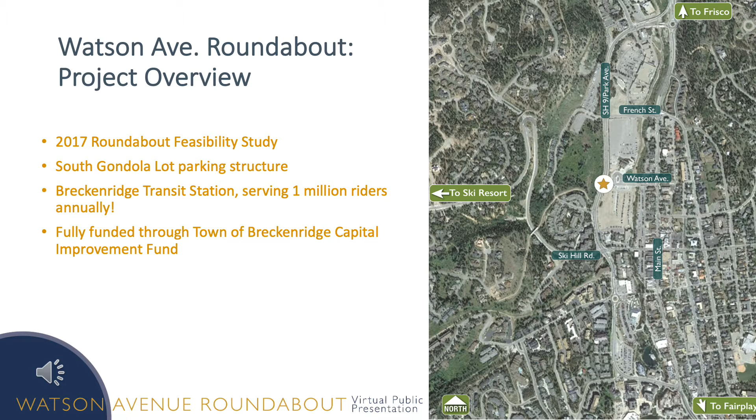The scope of this project is to complete a preliminary and final design of the roundabout, which addresses both the safety and operational improvements of the intersection. The town is also exploring reconstruction concepts for the transit station in conjunction with the roundabout design. More info will be coming soon regarding the transit station redesign. This project is entirely managed and funded through the Town of Breckenridge Capital Improvement Fund.

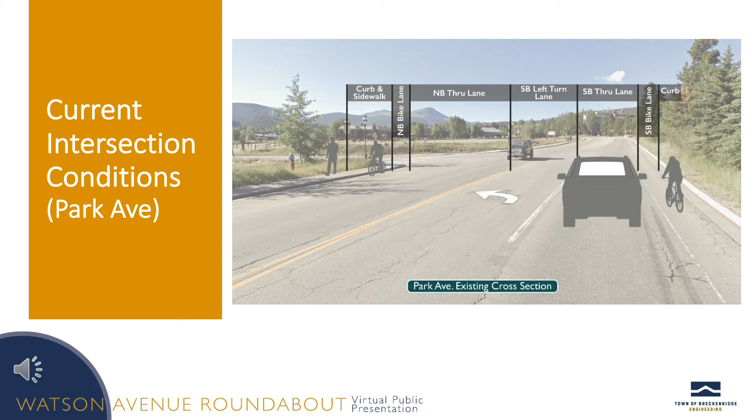Currently, Watson Avenue forms a three-leg intersection with Park Avenue with stop control on the Watson Avenue leg. Park Avenue has single travel lanes in each direction with outside bike lanes and a designated southbound left turn lane. Watson Avenue also has single travel lanes in each direction with outside bike lanes and a designated westbound left and right turn lane at the intersection.

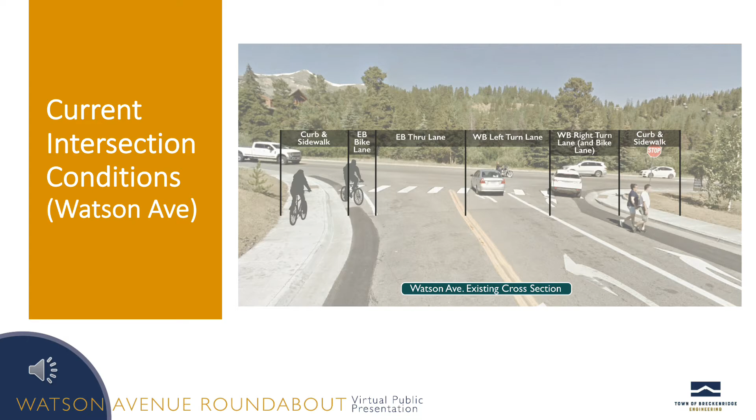The driving needs for the roundabout improvements include existing and future traffic volumes, additional parking being added on the South Gondola lot, high volumes of pedestrians in the project area, and overall safety improvements for all users. The stop control on Watson Avenue makes it very difficult for buses and vehicles to turn left onto Park Avenue. A preliminary traffic analysis verified that the existing intersection functions at a level of service F, meaning drivers see excessive delays and poor travel times, and the traffic exceeds the amount of vehicles that can be accommodated.

As mentioned earlier, the South Gondola lot is currently being redeveloped into additional parking. The combination of the surface parking lot near Watson Avenue and the new parking garage on the southern half of the parcel will be adding 425 additional parking spaces and substantial vehicle and foot traffic to the site. In the winter months, most of the people parking in this lot will be ultimately crossing Watson Avenue to access either a bus or the gondola at the transit station.

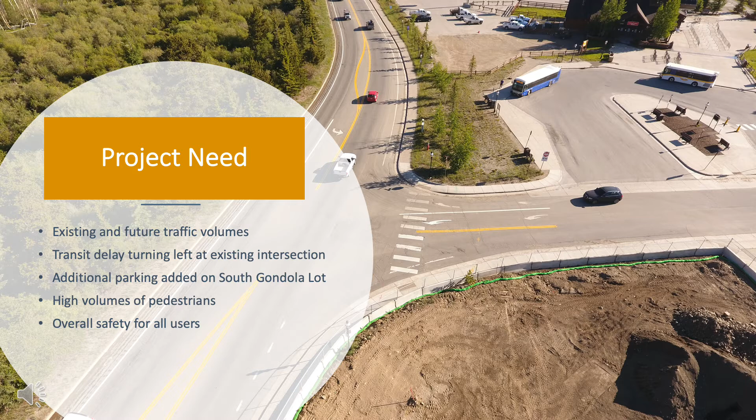The town is working with a consultant team to assist in completing preliminary and final engineering design plans for the roundabout. The extents of the roadway improvements measured from the center of the intersection extend approximately 400 feet to the east, 400 feet to the south, and 800 feet to the north. The land to the west of Park Avenue is currently undeveloped and known to contain wetlands. The wetlands will be avoided as much as possible, and the roundabout circle will be located in such a way to balance and minimize impacts to each parcel.

The preliminary traffic analysis played the main role in determining the laneage of the proposed roundabout. The projected year 2040 traffic volumes indicated a traditional single-lane roundabout would continue to function at a poor level of service, experience significant driver delay, and reach its capacity before the design year 2040.

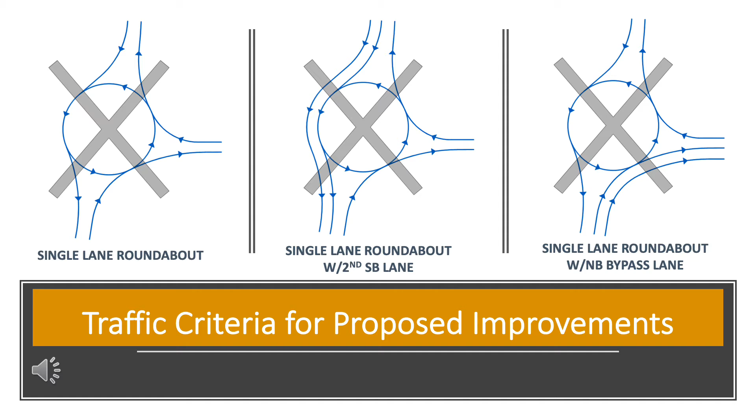Two versions of enhanced single-lane roundabouts were also analyzed, including combinations of a second southbound through lane or the addition of a northbound right turn bypass lane. However, no combination of a modified single-lane roundabout could accommodate all of the through traffic expected on Park Avenue by year 2040.

The town and design team ultimately decided on a multi-lane roundabout with two through lanes in the north-south direction and a single circulating leg entering and exiting off Watson. While the long-term vision for the Park Avenue corridor incorporates widening the roadway section from 2 to 4 lanes, this project will still be tying into the existing 2-lane section of Park Avenue.

As part of this project, the second northbound lane will extend from the parking garage access on the south gondola lot through the roundabout and merge back into a single lane prior to French Street. The second southbound lane will begin a few hundred feet before the roundabout to allow traffic to fill the lane, and then will merge back to a single lane at Mountain Thunder Drive. The through lanes cannot begin or end any closer to the roundabout without the roundabout operations breaking down and traffic queues backing up into the roundabout itself.

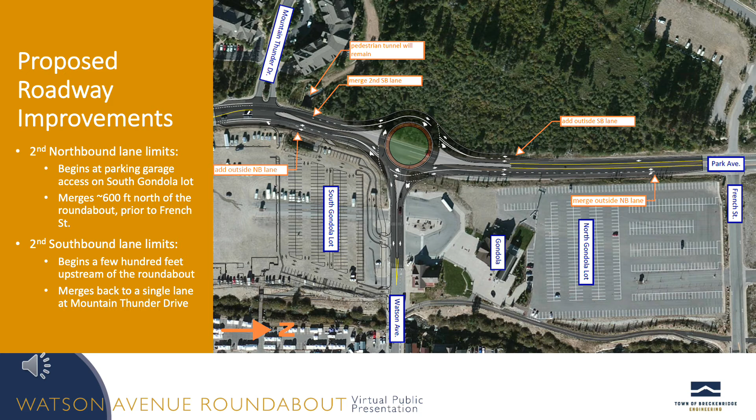Additional criteria that was used to inform the size and geometry of the roundabout included that all buses must be able to safely and smoothly navigate the roundabout without crossing any pavement striping or mounting any curbs. Larger trucks on Park Ave will also need to successfully navigate the through movement of the roundabout to continue along Park Ave, and slow and balanced speeds must be maintained for all movements at the roundabout to make it safe not only for vehicles and buses but other potential users.

Following a few rounds of conceptual layouts and refinement, the team has landed on this concept for the new roundabout. This concept is a multi-lane roundabout with 2-lane entrances and exits on Park Avenue and a single-lane entrance and exit off of Watson, includes raised medians on all approach legs to discourage unnecessary and unsafe pedestrian movements, has a northbound bike ramp located upstream of the roundabout entrance for recreational bicyclists to navigate the roundabout outside the flow of traffic, and it ties into the sidewalk in the southeast quadrant that is being installed as part of the parking lot construction. Lighting and landscaping have not yet been incorporated but will be added in the next phase of design.

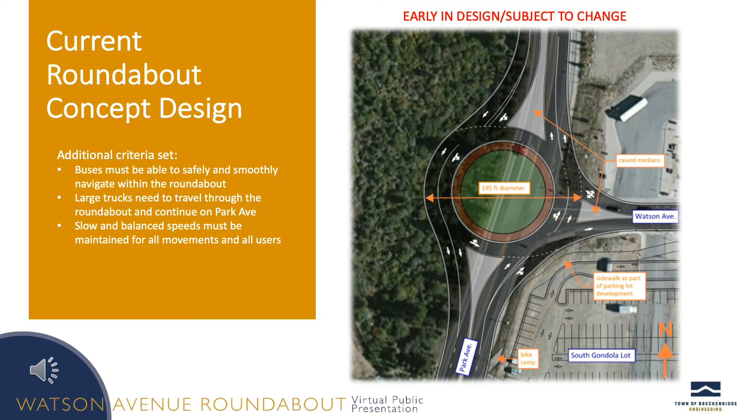Preliminary design for the roundabout is planned for August through December 2020. Final design will begin in December and be complete in the fall of 2021. Coordination with CDOT and right-of-way acquisition will also occur between December 2020 and the fall of 2021. Construction of the roundabout is scheduled for spring and summer 2022.